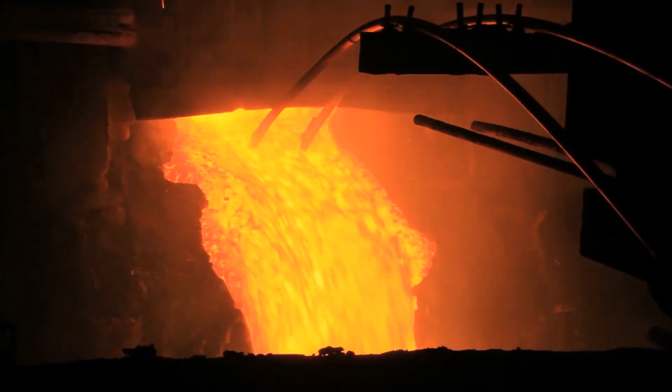In this video, I'm going to explain the procedure of fabrication of a tank from scratch to complete development of tank fabrication. What are the major procedures, activities, and quality-oriented tests involved in this process for tank fabrication. So stay tuned till the end of this video.

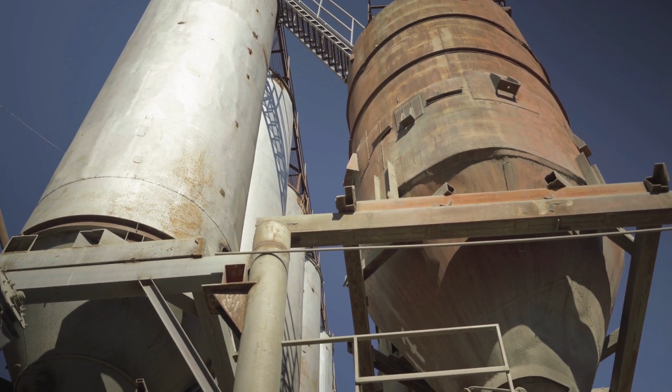So as of now in today's video, my target is to explain about tank fabrication. After understanding this process, you will be able to feel how planning engineers are going to use this data, load it within certain software, and convert it into magical transformational data.

Let's start. In this video, I'm going to explain the fabrication procedure, what kind of tasks are involved while developing this kind of tank fabrication. You must have seen such tanks around the industry, in chemical industry, fertilizer, and petrochemical refineries.

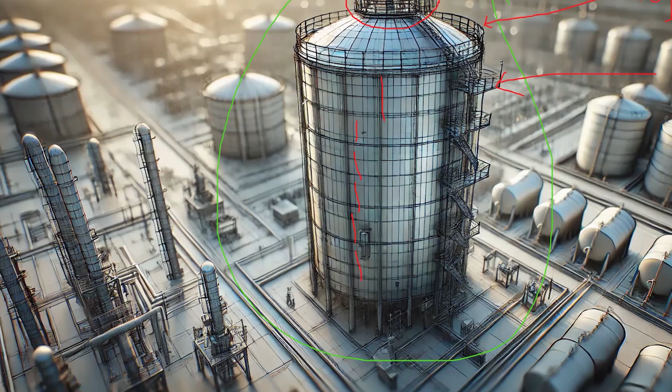So there are 1, 2, 3, 4, 5, 6 shell plate courses. They will be fabricated separately, right? Their rounds are going to be considered one by one. So this portion is called the shell area of the tank.

This area would be considered as the bottom plates or sump. The sump relates to a certain valve which takes all the drainage, an outlet valve you can say. So this is the bottom plate area. There are staircases for the workers to go to the upper area for maintenance purposes, for installation of nozzles, and for piping outlets. A PSV, pressure safety valve, should be installed over here. So these are the different parts of a certain tank.

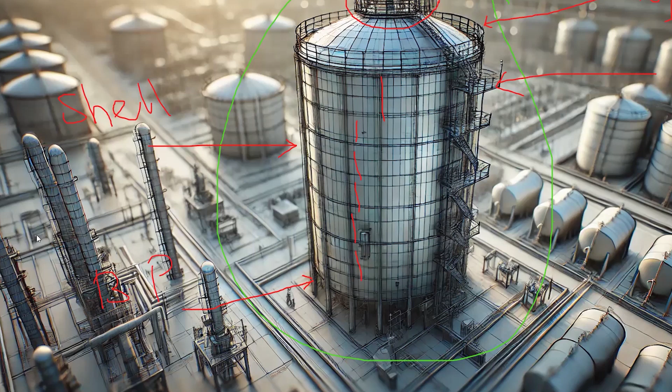After understanding it, we are going to start fabricating from scratch level. I'll be sharing pictures with you to visualize when we work inside our workshop area and yard area. Our workers start working from straight fabrication sheets. First the activities of layout and marking, then they roll out those sheets. They do sandblasting, then beveling and welding, right? So I will take you on the Primavera P6 dashboard.

Accordingly, I will be explaining each task from this stage up to that stage. This is the manhole or manway, and this is the top area. This is the top roof again. These are the shell courses, 3, 4, 5, 6, 7, and then this is the bottom area. So in our case, we are going to fabricate every process separately. In our tank fabrication, there are two processes: first is foundation, civil works involved, and then fabrication and erection.

So I'll be explaining all this on the Primavera P6 dashboard. And here we are - first of all, I'll be taking you back to the foundation. So it's a very simple thing, right?

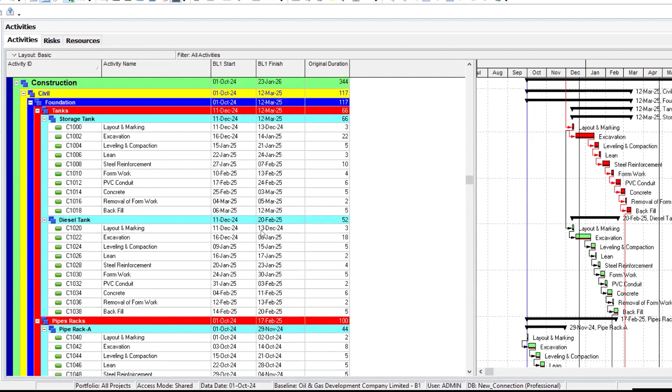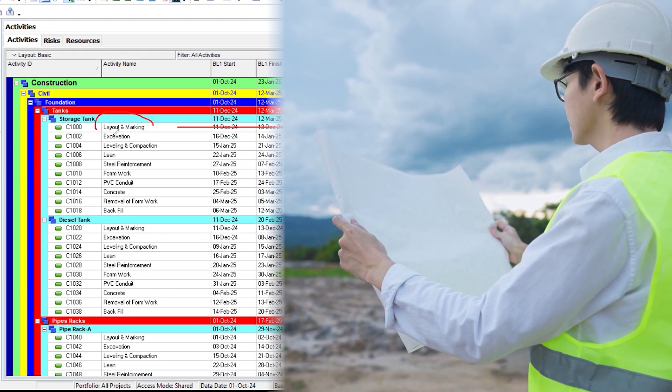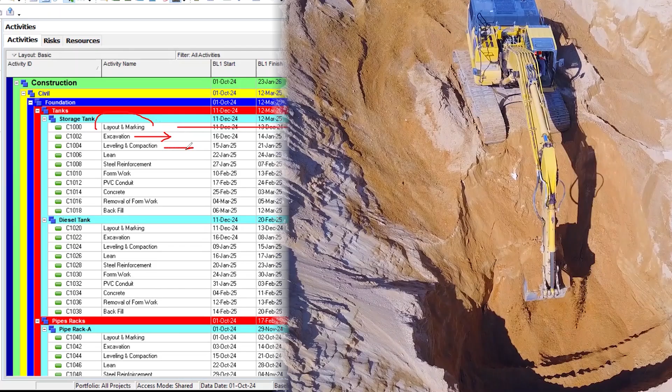Over here, you can see layout and marking. Layout and marking explains that whenever we select the industrial zone in our factory where we have to place that tank, we have to certify that this area is certain for the foundation construction. Then within that area, we start excavation as per the designer's recommendation, maybe half-meter depth and all that. Then leveling and compaction - we reinforce or strengthen that area.

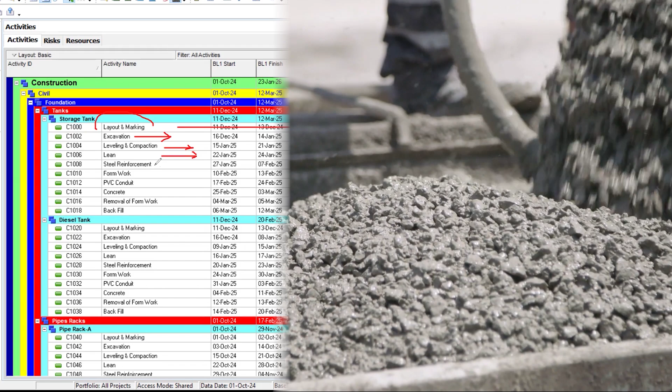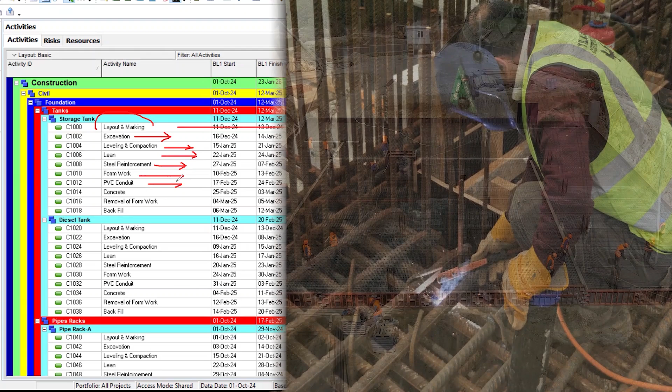Then we proceed with the lean activity. After the lean is dried out, we have to place rebar work as per the bar schedule, and then formwork or shuttering. Then we place any PVC conduit which is supposed to pass through that foundation for the purpose of the tank placement. Then concrete pour and removal of formwork, and then backfill. So these are the certain activities you can see for how we need to proceed to construct a foundation.

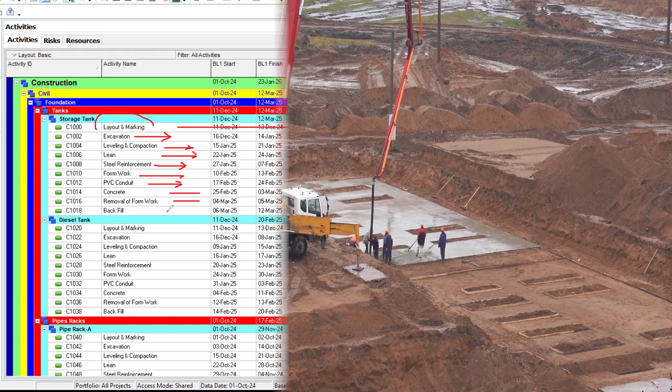So as a site engineer, or as a fresh graduate, or even if you don't belong to planning engineering, you can just imagine how these activities can be visualized anywhere. But when you start your journey as a planning engineer, you'll understand how these activities come up in sequence - why.

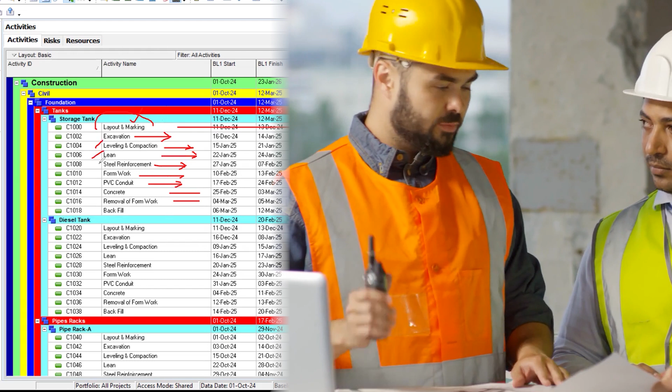Because we are supposed to make their dependency - if this activity is going to be done, then we have to start this one, then that activity. The only logic you can think about is that after arrangement of the layout and marking, resources, time, cost, and everything, you are supposed to start arrangement of this activity, then the activity after this one.

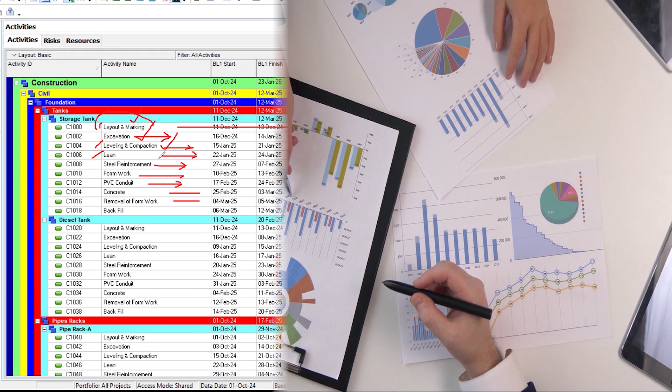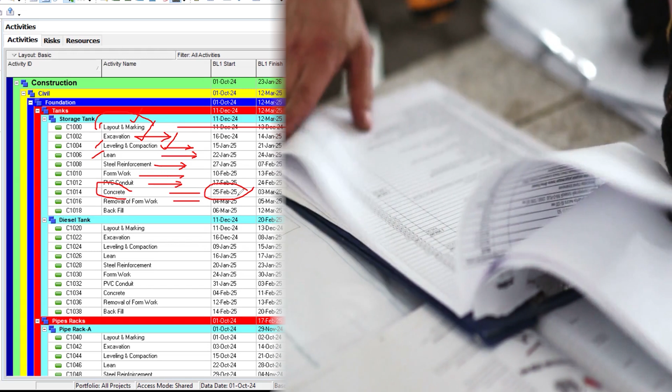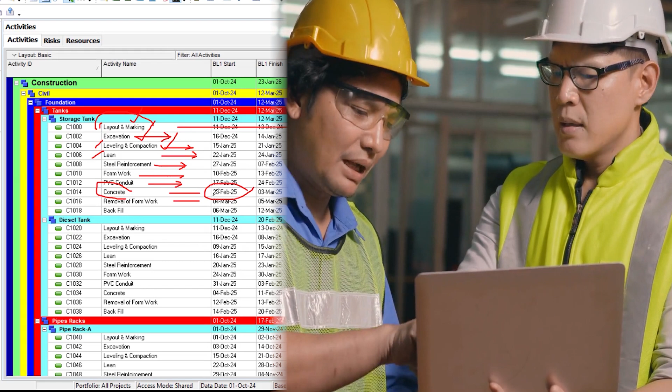You need concrete at this stage on a certain date. So once this dependency is settled, only then can you arrange this concrete on the 25th of February. When you are doing your project planning engineer job duty, everything is sorted - time management, cost management, resource management. You'll understand that between 25th Feb and 3rd March, within these 5 days, you are going to bear the cost of this concrete, so your cash flow will be adding up that value as well.

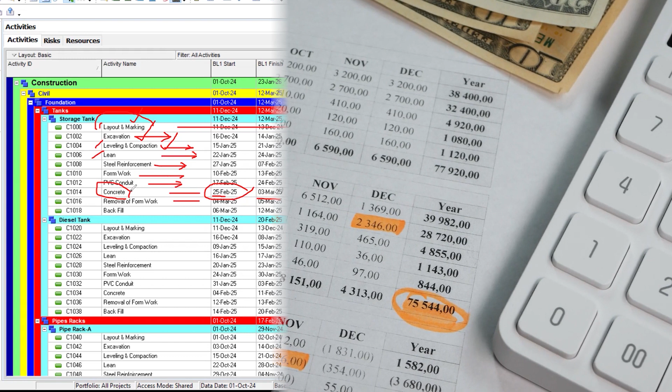So that is how, as a planning engineer, it is not only about sequencing the activities or understanding the simple activities, but at the same time, after familiarity with all these basic tasks, you are going to arrange these tasks in a sequence to make them into a project schedule.

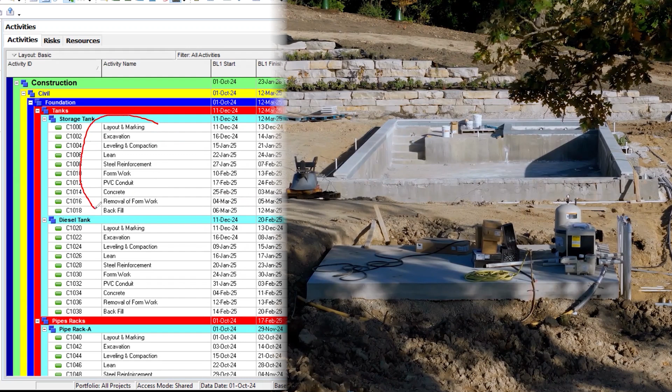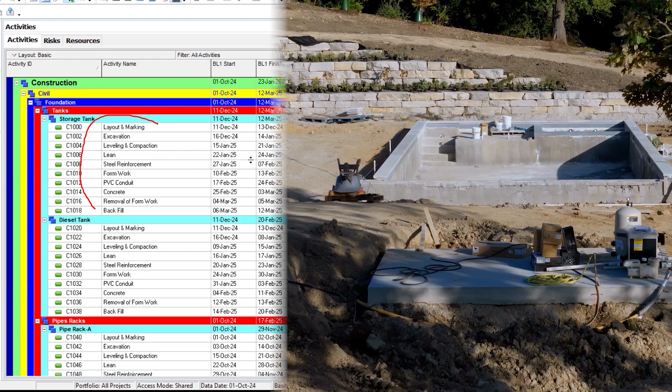So the civil work is done. Now, after this civil foundation is done, at the same time this is being done on the site area, but what is going on in the yard area or in the workshop area? I'll explain that as well. This is the storage tank, and inside our fabrication, you can see what is going on in the yard area - bottom, shell, and roof.

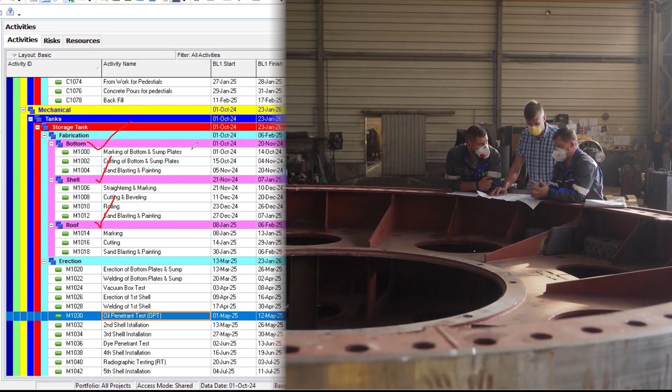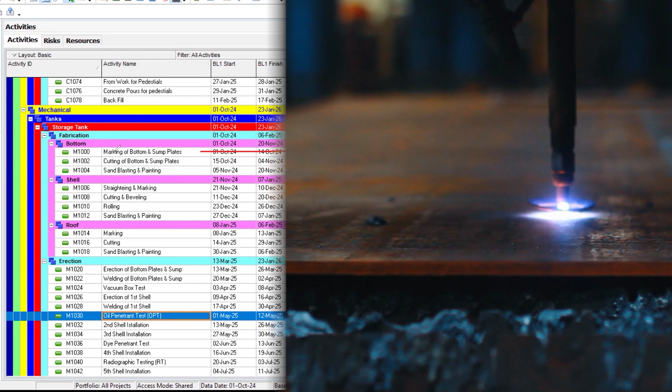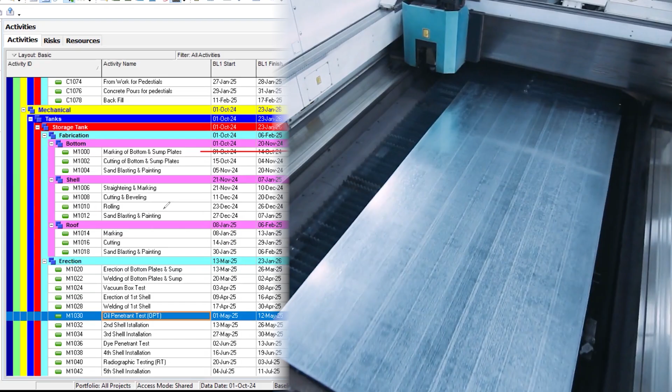What you are supposed to do first is the fabrication sheets, marking of bottom plates - the welder is making marking as per the design, then cutting, then sandblasting and painting. The same goes for all the courses of shell plate: straightening, cutting, rolling, sandblasting, and for the rooftop area as well. Now erection is going to start, and I'll explain one by one.

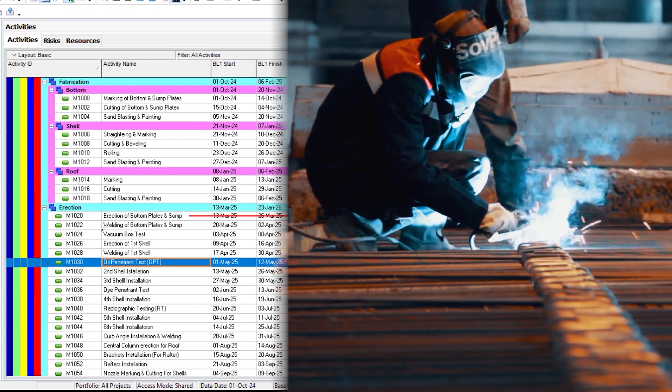Once erection of bottom plates starts, you take all those plates to the foundational area and make the welding. First you make erection and installation, then you make the joint, beveling, cutting edges, and then start welding.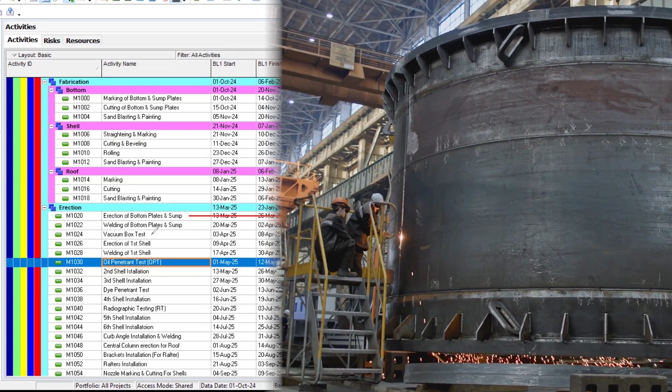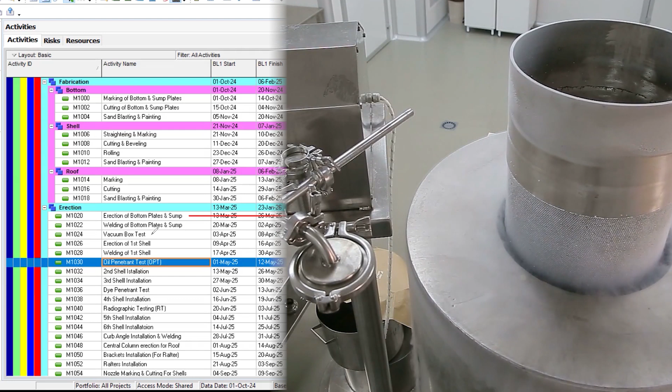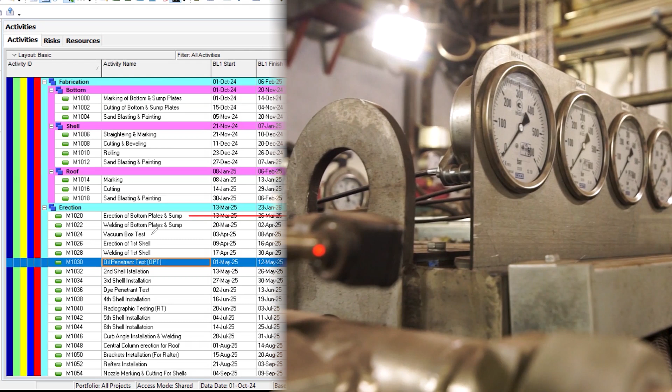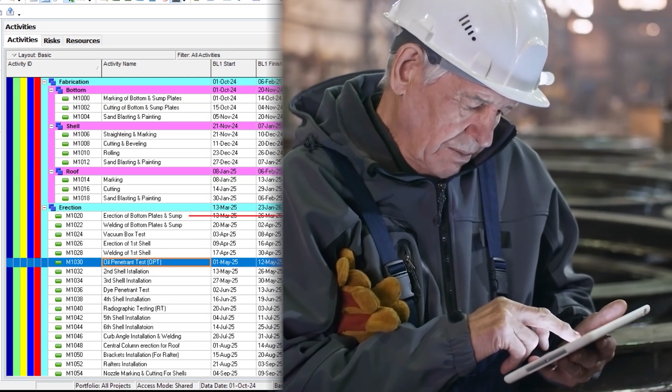Vacuum box test is part of NDT testing, a non-destructive testing method used to detect leaks or defects in welding joints, especially in tank bottoms, pressure vessels, or pipelines. As a planning engineer, you understand this QA/QC requirement as well, because in job interviews, sequencing using Primavera P6 is one thing, but another thing is to know about conducting such tests. The vacuum box test is used to check if there are any leaks. Once the bottom plate erection is done on the foundational area, welding is done, and the test is done, we move forward.

Erection of first shell - I told you earlier what the first shell is. See over here, once this area is done, this is your first shell, this is your second shell, this is your third shell, fourth, fifth, and this one is sixth. Step by step, you will understand all these things.

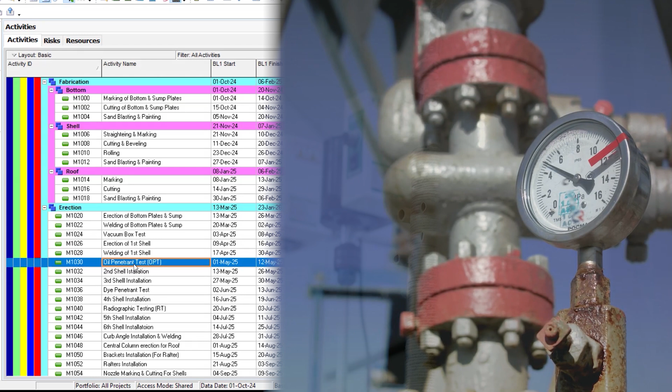First shell: erection of first shell, welding, then oil penetrant test - this is another test in the same category of NDT testing, also known as liquid penetrant testing, LPT and OPT. This NDT technique is used to locate surface breaking defects such as cracks, porosity, or seams in non-porous material. This is also a type of testing once we are done with our first shell.

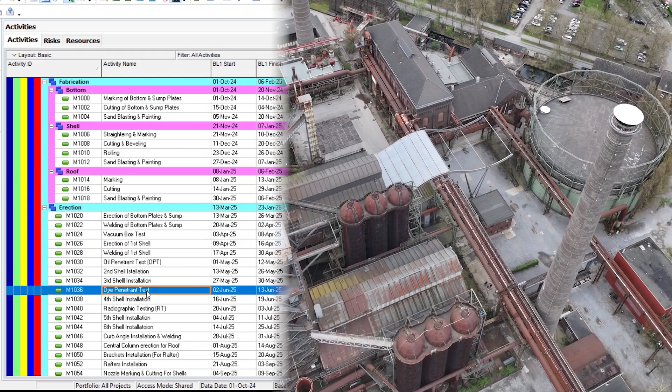Then we start with second shell installation, third shell installation, and dye penetrant test - the same as OPT. In dye penetrant test, you use some color, some fluorescent, to detect if there are any cracks or leakages. Then fourth shell installation, then we have radiographic testing.

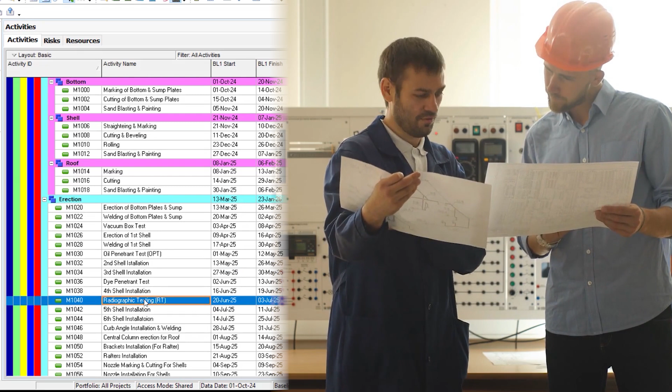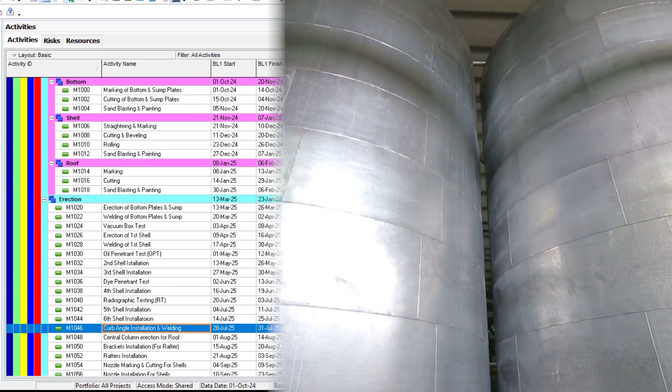Radiographic testing is also an NDT method using X-rays or gamma rays to inspect the internal structure of material for flaws such as cracks, voids, or inclusions - this is a radiation-oriented test. Then fifth shell, sixth shell, and then curb angle installation - you can see there are curves, and before that you can see there is an angle.

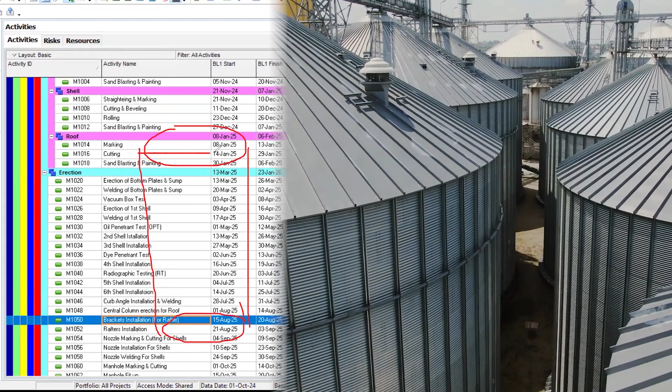A curb, like it is going like this one, right? So installation of this one, and then you can see that central column erection for roof. Obviously, the tank construction, such a heighted tank, needs some support in terms of column. Brackets installation for rafter. Rafter is a horizontal beam. So I'll be sharing. See, this one is your tank. And here you can make, this is rafter, horizontal beam. So here is the curve like this one, right? So that is how you have to understand the different structural items as well.

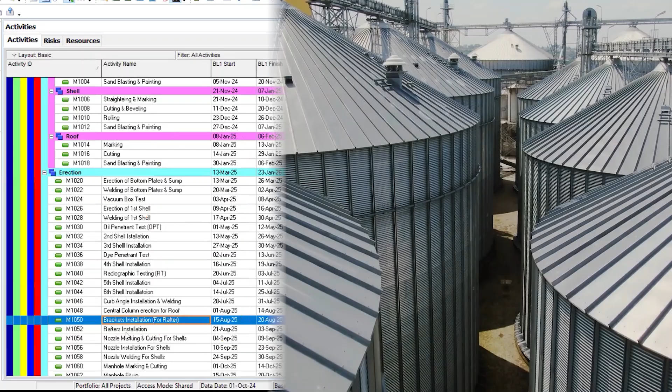Rafter installation, nozzle marking, nozzle installation. These are the nozzles in the shell area, bottom area, in the top roof area, where you need to put some gauges, pipe taps, for temperature, for pressure, for nozzles, for outlets and inlets, flanges.

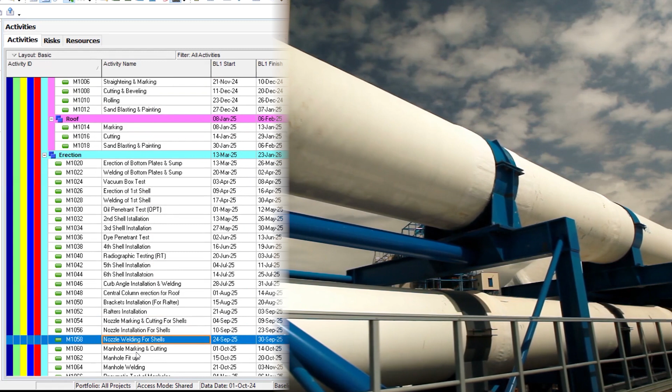So manhole is something from where you can enter in that tank for the maintenance, manhole fit up, right? So this is supposed to be like a manhole, right? Over here. But when we are taking the horizontal view, see, this would be the manhole. And then I'll be sharing again manhole welding. Obviously, you are going to weld this one. Pneumatic test of manhole. You are going to make pneumatic testing with the usage of air.

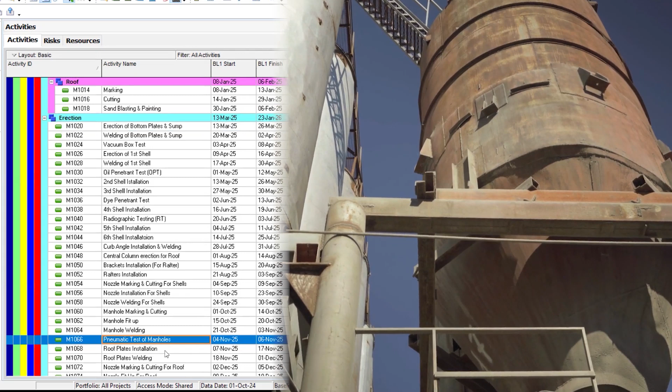Roof plates installation, roof plate welding, nozzle marking, and all those things one by one. Then again, nozzle welding, vacuum box test, installation of platforms, punch list. If something is left behind, you are going to document all those things, make the accessories and all that.

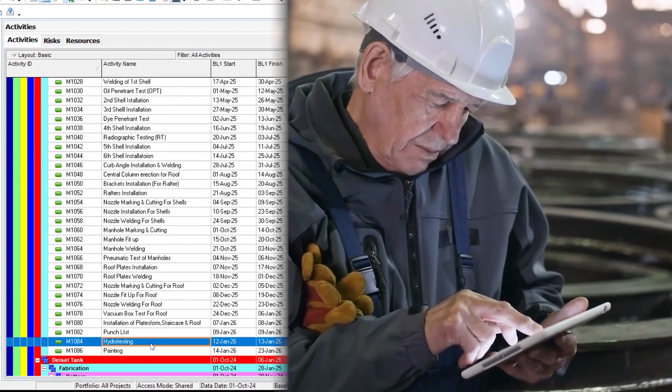Hydro testing, you are going to fill that tank with water, implement the hydro testing pressure limits, and hold for that as per the prescribed or instructed time durations. And then painting for that tank if hydro testing is successful.

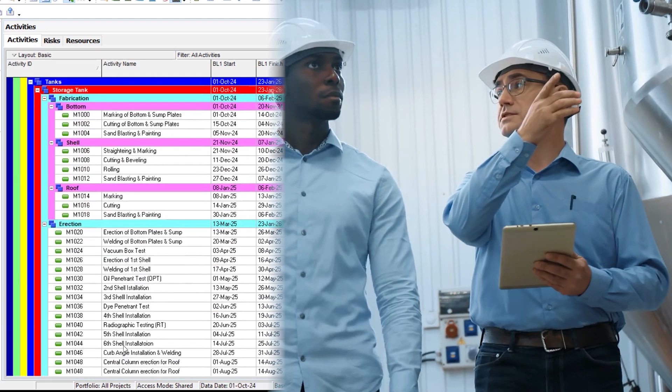So that is how you can understand that how easy for a planning engineer that after foundation you have to make fabrication of bottom plates, shell plates, and roof, and then erection one by one. So these are the things you need to collect data as a sequence of activity list, right? So this is scope management for the fabrication.

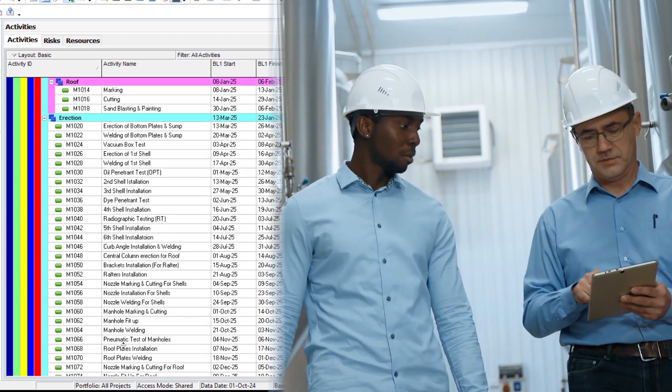Tanks vary from one to another. There are pressurized tanks, there are vertical tanks, horizontal tanks, but overall, I was explaining over here diesel storage, crude oil storage tank over here, right? So these are the general activities specific to a project fabrication, and you can gather the data, you can make

sequence and create their critical path method, link all the activities with respect to their dependency. If you are a new one, you can talk to your project management team, but my intention is to deliver this data as per the industry oriented practices. So this is the scope management for the fabrication of these plates, civil works, and then dependency model is explained

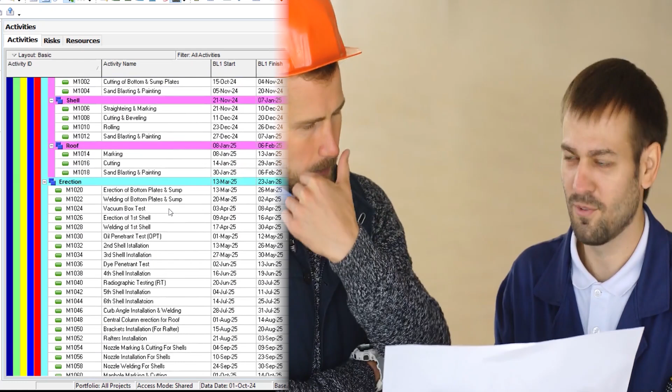like everything. You can see that once bottom plates are done, you are going to start erection. Then shell plates will be done. Then you are going to make erection. Then plates are done. Then you are supposed to make their erection over here.

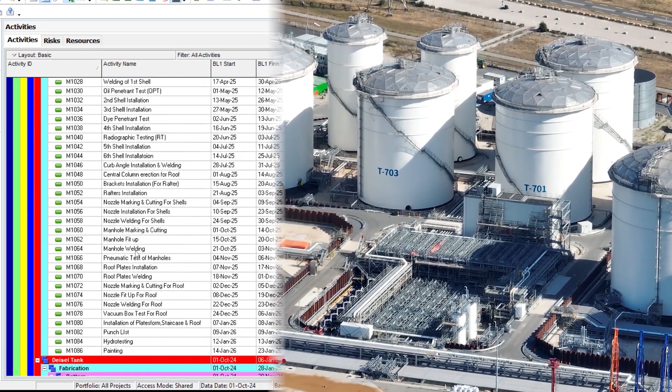So accordingly, testing is going on, and your site team is going to document each and everything, reporting back to the head office. Planning engineer is supposed to take that data. So what is done, what is left behind as per time management, cost management, and resource management.

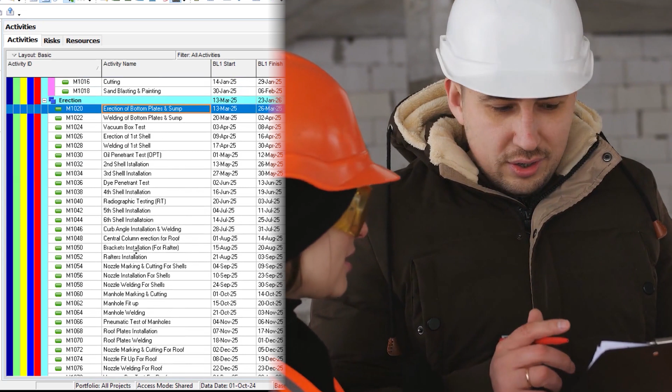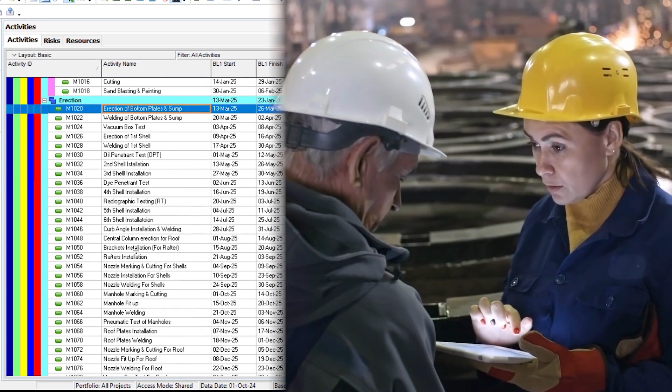So that is how you need to, first of all, as a planning engineer, you need to understand the development of, so this is called product development, right? So that is how, as a planning engineer, you have to grip first thing. If you have no exposure to the site, or you are jobless and you are looking for a job, so you need to watch such kind of videos to get that exposure as a product development, different kind of stages, because product development is one of the four most important pillars of a planning engineer.

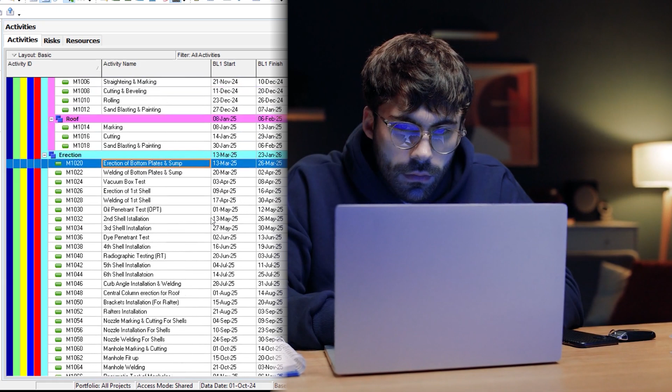The first one is project management. That is easy to understand: time management, cost management, resource management. But to implement project management, you need to understand that how foundation will be developed, how fabrication will be developed, right over here. So product development is that much important. And then your Primavera P6 learning is very important, the third important pillar for planning engineer. And the fourth one is contract. Within contract, your different contractual milestones will be explained.

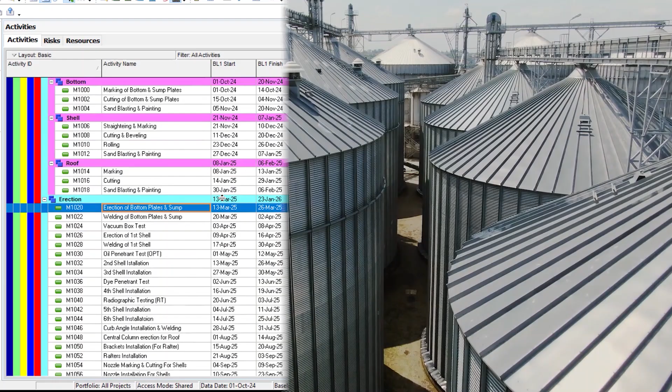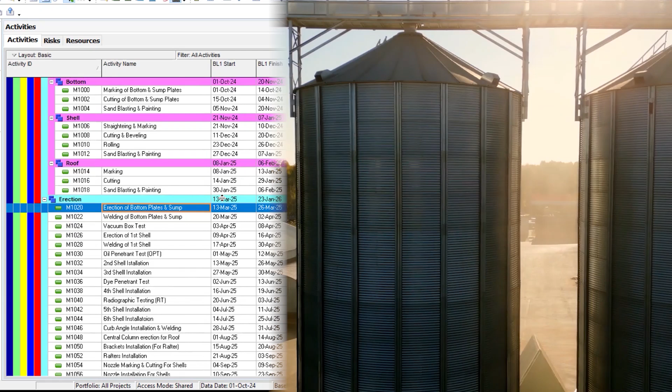So I hope this video has helped you to understand from a very scratch level that how industrial tanks fabrication will be conducted. And I hope you like this video, and it is going to enhance your understanding of project planning control in with respect to product development.